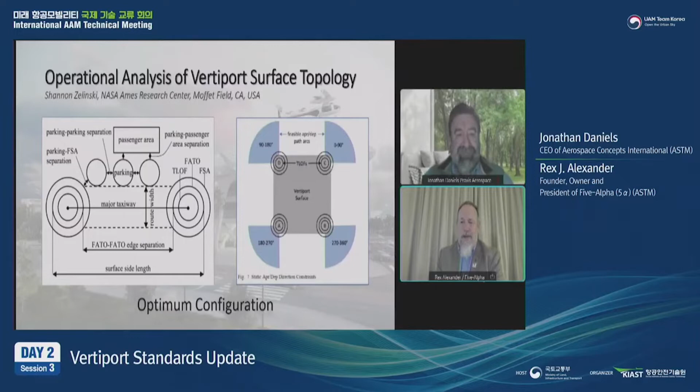In a white paper published last year, we looked at different possible geometric shapes for vertiports, as well as all the different possible outlines. On the left is a very standard, traditional straight throughput design with a landing and takeoff area - the TLOF and the FATO - and a safety area on either end with parking in the middle. The figure on the right is a larger design with 4 independent landing areas, one on each corner, and surface parking in the middle.

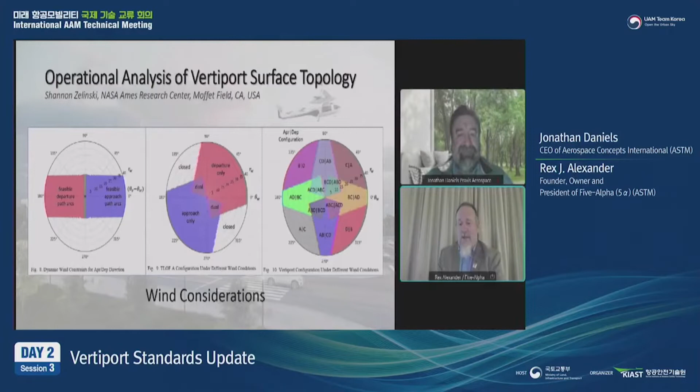Looking at what that meant, one of the things we examined was wind considerations. In developing the white paper, NASA looked at the different feasible approach and departure paths. For helicopter operations, and the same for fixed wing operations, downwind operations are to be avoided - it's much more challenging from a performance standpoint and offers less controllability. So in evaluating the different wind conditions, we looked at what was possible, what was probable, and what was recommended as far as avoidance. These are just a few of the graphs from the published white paper.

Then, looking at the approach and departure paths and how they connected, the other piece was examining the maximum possible throughput for traffic we could potentially achieve. In doing so, the 2 images in the middle are the ones that provided the highest throughput based on the mathematical calculations NASA worked on in this particular case. These are what we would refer to as UML4 considerations.

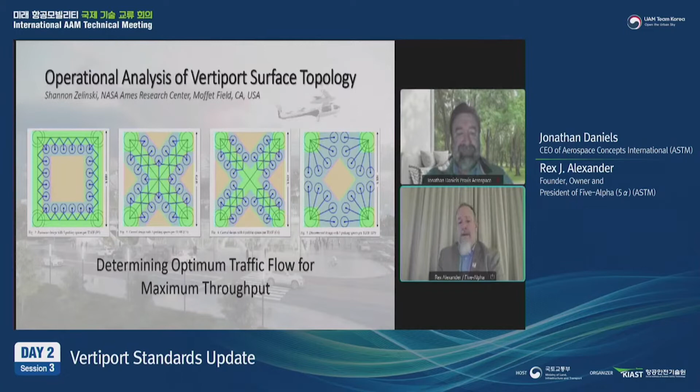And now I will turn it back over to Jonathan.

So as I had mentioned, NASA funded a high-density automated vertiport research project. And that project was composed of 4 different sections: a trade study, a concept of operations, a software requirements matrix, and then some additional actual software development pieces that have turned into the basis for our SDSP standard.

And what they were really designed was taking a look at, as Mr. Ganchu had talked about, the existing UTM work and how vertiports came in, and the idea that if there are UTM corridors or UAM corridors for our eVTOL aircraft to be flying on and be deconflicted off of, at some point you have to enter and exit those highways in the sky.

And we looked at that as the base model, and then using the UML4, we applied it to a high density concept of operation. High density was defined as 100 or more takeoffs and landings within 1 hour at a single vertiport. As we started to build that out, much of the things that Rex just described, the challenges to the real estate size and the spacing and even some basic, just fundamental geography, really became apparent to us.

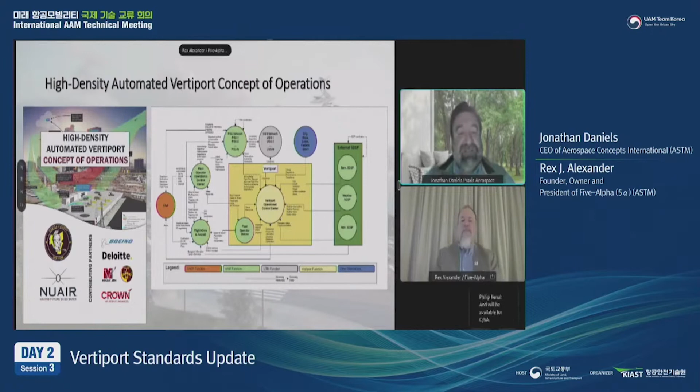So the meat of what developed was the vertiport automation architecture. That idea was that the piece that belongs at the vertiport really had two different sections. One part of that was what connected to the PSUs on the outward facing side, and the other part was more internal and identified the requirements for how you would track parking locations, ground traffic, taxi departure, and all the contingency and off-nominal items that would occur.

Additionally, one of the items we discovered, which I know we're going to get into a little more, related to the sequencing of approach, because oddly enough, with 100 operations an hour, that means something is landing every 30 seconds or less, or taking off every 30 seconds or less. And that requires much more maneuverability and optimization than merely accomplishing that 30-second timeline.

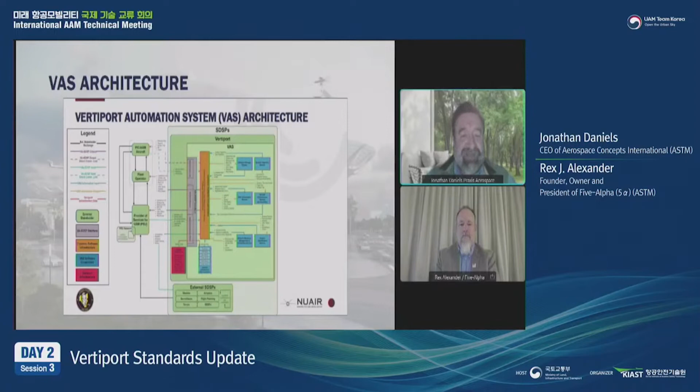So on the VAS itself, really tied into some basic core services to enable the functions that you would then provide—not just the management of vertiport resources, what pads were available, what type of parking, what type of refueling, but also to make sure that everything occurring on the surface itself was actually following the guidelines and procedures that were in place.

So that if there was an aircraft that was running behind, or if someone dropped their luggage or something to that effect, or the passenger slipped getting into the aircraft, that all of that was captured in some way and able to be fed both locally at the vertiport itself, as well as transported out through the SDSP to the larger system for the PSUs to take out of.

It did tie into our hazard conditions and our risk. It did very much highlight the need for good situational awareness, as well as some of the limitations and potentials of autonomy. One of the following items about external stakeholder communications was that notification outside the facility itself, in the interest of an incident or some type of contingency, whether that was firefighting or rescue or even assisting with people who are not participating in the eVTOL PSU network.

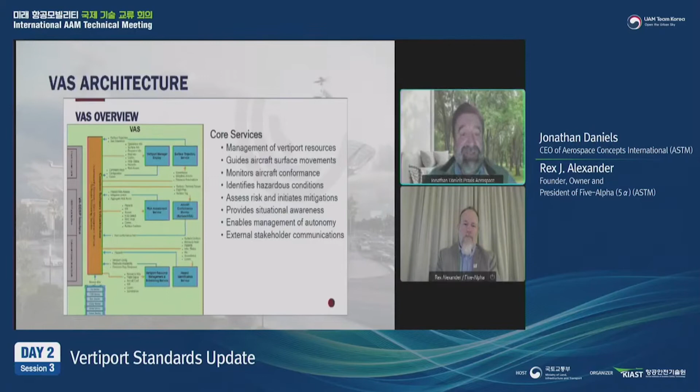I think one of my favorite pieces, as a former helicopter pilot and something of an instrument approach aficionado, or as Rex calls me, a nerd.

One of the things we developed out of this was this concept of a vertiport operations area and then the vertiport volume. You see that depicted here. The vertiport operations area is that larger blue-purple sphere and disc you see in place, while the vertiport volume is really on top of the geographical location itself of the vertiport.

And as we developed this, we realized that in order to get the sequencing you need, you really have to have the outer spacing consolidated and federated in a way that it didn't matter which PSU was being used. It didn't matter if they were participants or non-participants, that we could feed them in together.

And we started developing this dynamic, not a straight-on linear departure and approach pattern like we traditionally see with modern manned aircraft, but we call it the carousel approach, where you picture those initial approach fixes on the outer surface rotating in time and not just being a single spot, so that as aircraft are cycling in, they're working through this pinwheel pattern before they make their final approach and enter into the point in space and final visual segment.

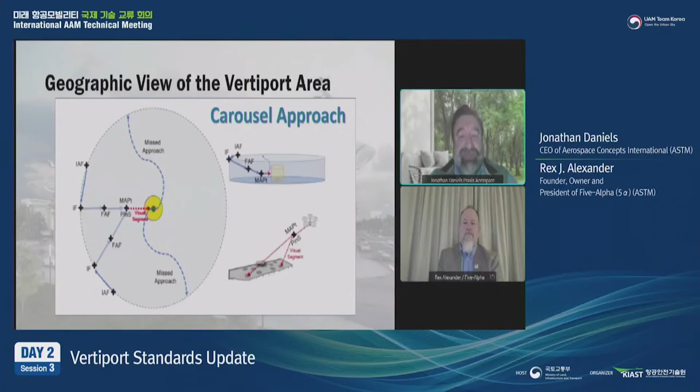On that larger connection of how all this works, our idea was it only adjusted everything with the vertiports, and the vertiport SDSP really only tied in on the on-ramp and off-ramp into the larger UAM and AAM corridors. Once you left the corridor and began approaching your vertiports, that was where the vertiport operations area really began, and you can see some of that depicted here. Because once you've left the vertiport and you're outside, as was depicted earlier in Mr. Ganji's presentation, that is where the traditional air traffic control and newly developmental PSU integration and UTM really takes over, and we didn't want to have a conflict there.

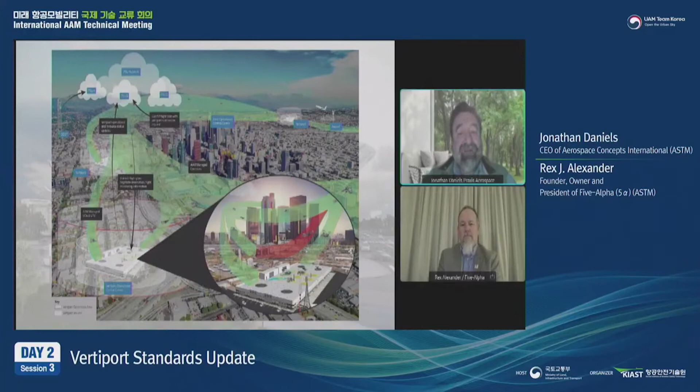These are more pictures of how that worked and some of the things that we put in place. We realized that it's very easy to optimize when everything is accomplished well and there are no questions, concerns, or sequence issues.

Once you start putting in the sequencing issues and someone falls behind, or there's some crosswind or other unexpected items on the surface or in the air, you really have to have a very robust system behind that in order to make everything continue working smoothly. It's very difficult to tell someone no in an emergency when they're attempting to land an aircraft that only has a minimal hovering capability and is kind of transitioned and committed to landing at that location.

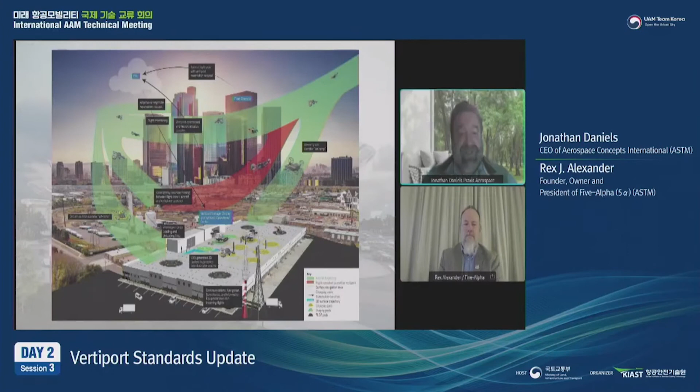This is a larger breakout and kind of describes the information that is available out there. Our trade study was when we talked to industry and gathered information on how the industry viewed the task of vertiport automation and where the ground truth and contemporary viewpoints were. We also, at that point, looked at the future work being done on the ConOps that were under development, and then started to develop that ConOps for how we would match where industry thought trade was, where the ConOps thought we were going.

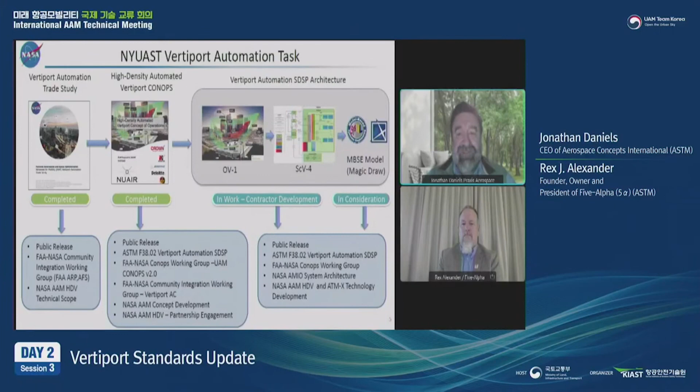The final piece was the vertiport automation side, which you'll see a series of OV-1s like I just described, as well as the systems views, all of which is available from the NASA site, as well as some systems-based or model-based systems engineering files that were designed to have that together. And as you can see, that now feeds some of the follow-on work, both with FAA, NASA, and how they're developing on the UAM, as well as NASA's additional ATMX and high-density vertiport discussions. Next, please.

So that concludes our portion. Really appreciate you letting us speak. Very excited to describe this work. It was about 1.5 years of our work just on the NASA studies alone, and we're continuing actively. As Rex did mention, there are many things that are tied into this that are continuing, especially on the ASTM side. Very excited that the current ballot's going out, so that allows us to really focus in on the SDSP.

Rex, do you have any closing comments you'd like to add?

No, thanks, John. There is a lot of work going on in the background. John and I are involved in quite a bit of that with not only ASTM, as I said, National Fire Protection Association. I'm actually the chair of the 418 committee, and working with the FAA on several contracts, as well as NASA on a couple of other contracts. The one that John just got finished briefing was a stepping stone for the new one that just kicked off, which is automated air traffic control. So hopefully by next year, we'll have a brief on that as well.